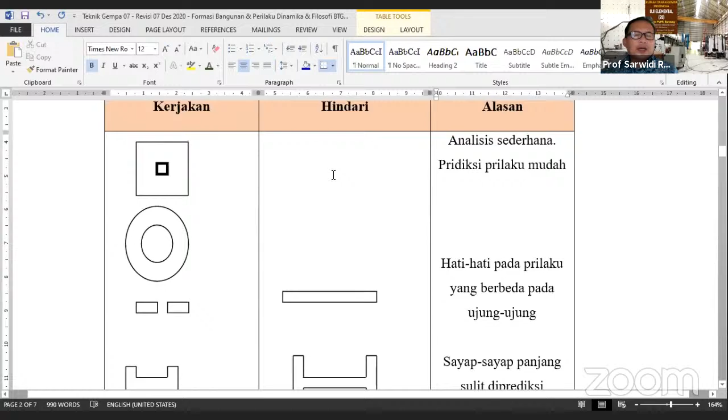So like temples, candi-candi. It is better to separate a complex, very difficult shape, because the analysis is very difficult and maybe we will have a very costly, expensive building. How about if it's very long? It's not good because there is different behavior from end to end. So it's better to cut it, to make it shorter by using a gap.

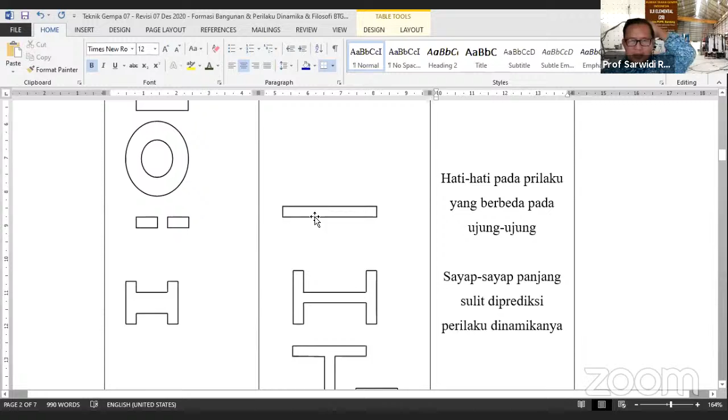Okay. Then, for example, this is using slim here, and slimming like this one is better than using more fat like this one. Because it will be different, the way is to separate the building, yeah.

Like in the FTSP building, our building on campus, our faculty. Actually, they have 5 buildings. It looks like there's only one, but there are 5 structural systems. So they will move differently from each other during an earthquake. So that's why there is some damage.

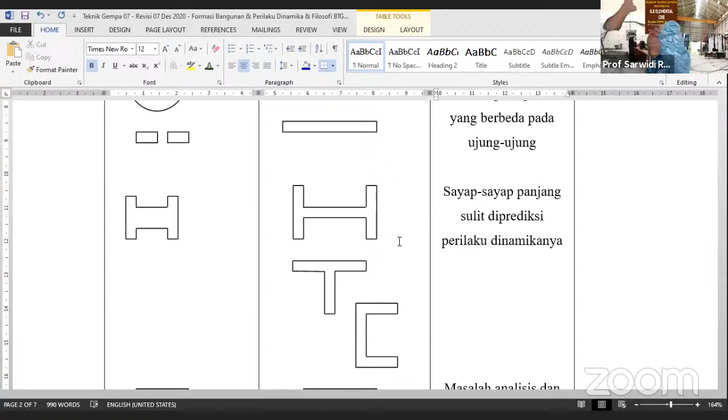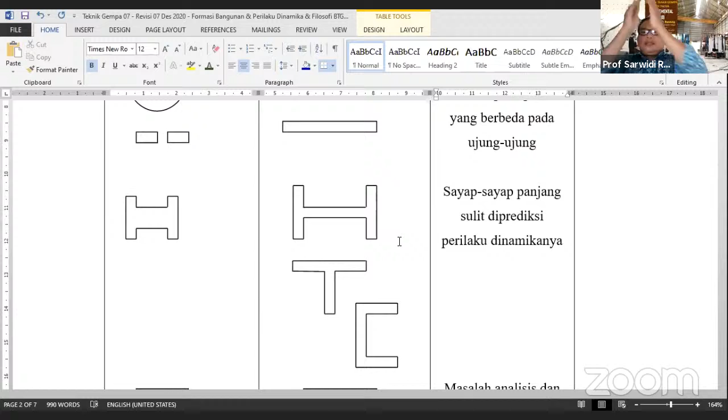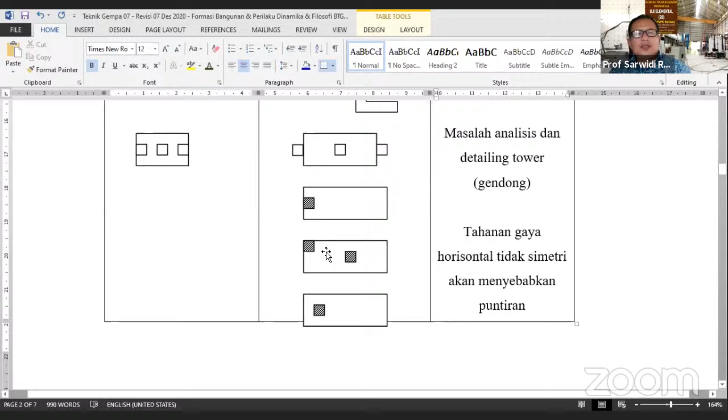Not the ceiling, but in the parapet, at the top close to the roof, because they are bumping each other. And then here is the side structure; the detailing is not easy, right? But if it's different, it is not symmetrical. You have trouble, more trouble.

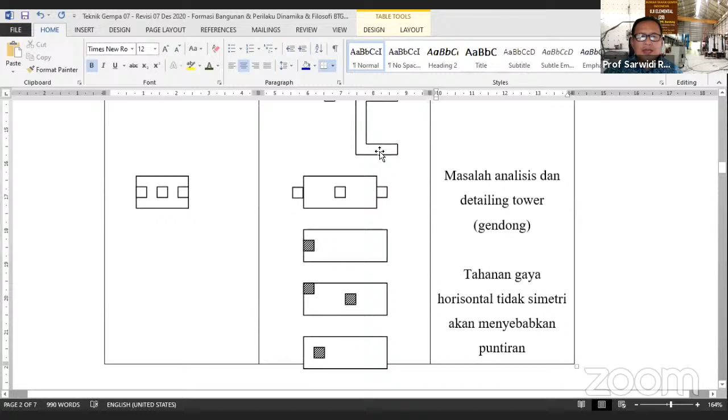But okay, you have to clarify to the owner and team that if you would like to have it different, like this one, it's okay, but the consequence is you need more time and more money to construct. To make it easier, there is a gap. And then a slim building, a softer building here is better. But slim is flexible and cannot be used for the shear building.

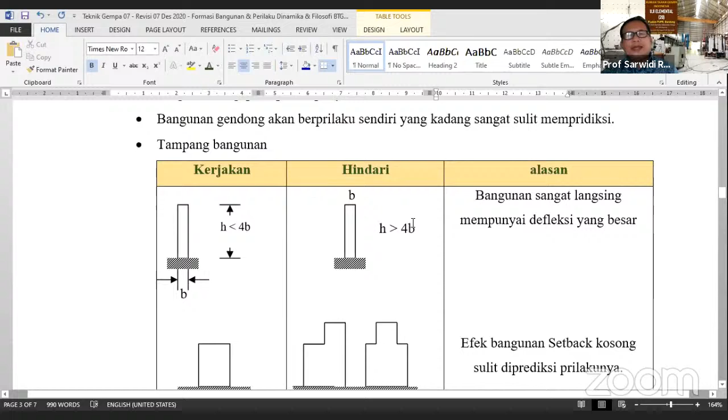So, here is the effect of setback, like the architect and the owner like this one. But you have to consider that this needs much more serious attention in your design. If you have a different level of attention between the left and right, you will have problems, because maybe the right one becomes more vulnerable or less resistant.

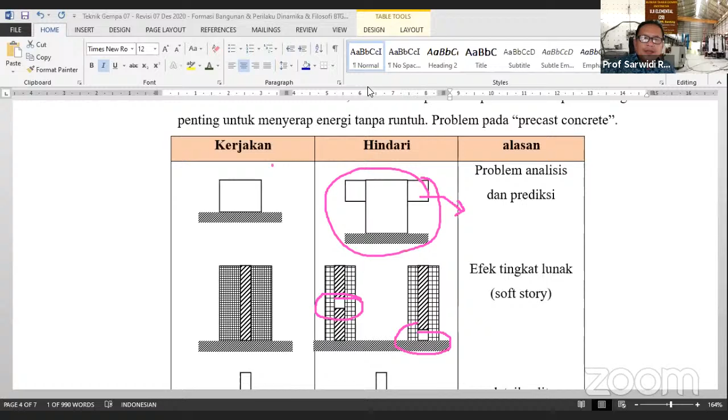So if you could decide to delete one, okay. If not, you have to spend more time and energy on the design to make it still resist the earthquake.

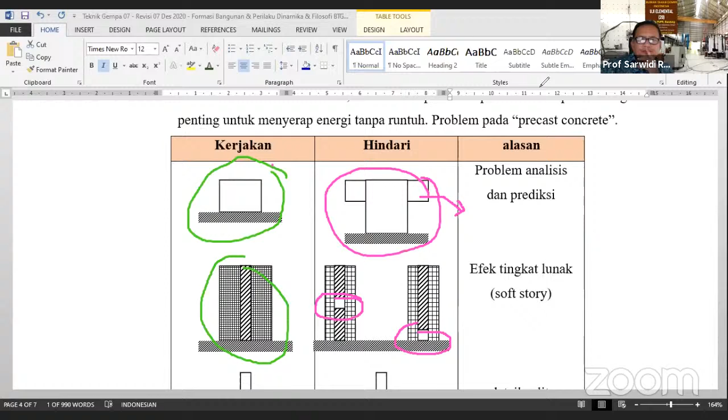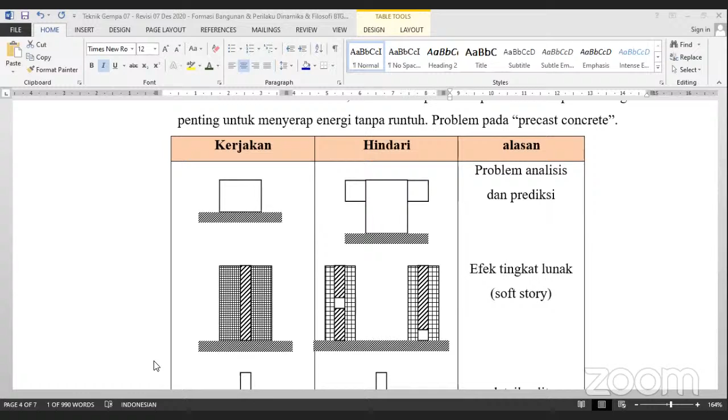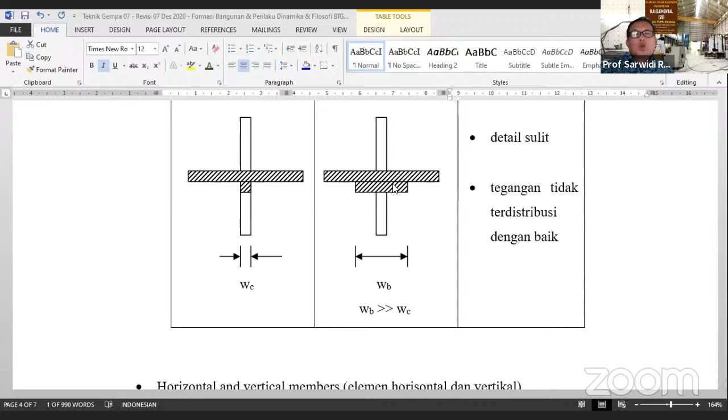Okay, and then in earthquake-prone areas, it is better to use a column and beam system. Not only column and slab; with that, the loads are not easy to distribute. Beams are better to distribute the floor loads. How about the vertical and horizontal members?

Over here, this is actually the horizontal beam, and this column is vertical. But it's not proportional. You have to have the hinge. The plastic hinge is better in the beam. So energy dissipation is better in the beam, because the beams work in parallel. If one collapses, you still have other beams there.

But if a column, for example the bottom column, collapses, the upper column could not resist, and all will collapse. So that's why the plastic hinge, you have to put it in the beams. So you have to have strong column, weak beam.